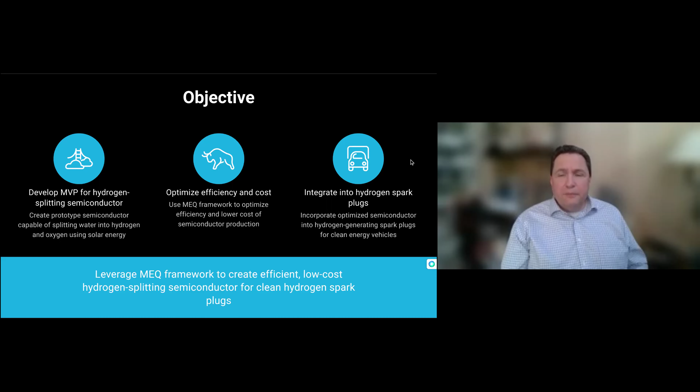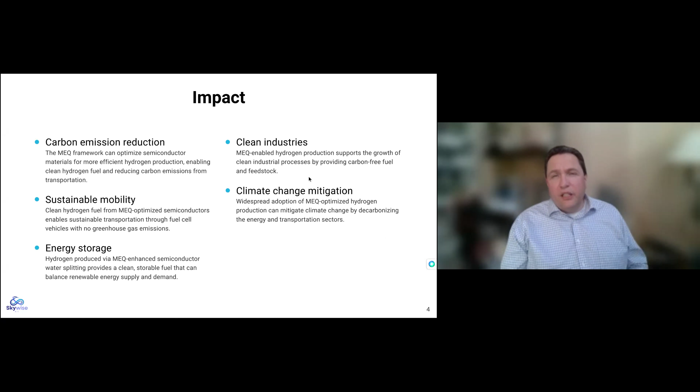So the impact, how we're going to measure that impact - there's a number of different ways that we're taking a look at it. We want to look at the carbon emission reduction, the greenhouse gas reductions. We want to look at different ways that we can use hydrogen splitting semiconductors for different fuel cells, to really boost up other forms of renewable energy as well too.

So the approach is, we want to take a very close look at the material selection and also really scrutinize the theory behind it. And we've been doing that along the way, and it's been turning out pretty well.

And why it's valuable, why do this? It may seem obvious, but I'm going to spell it out here. If we can have an efficient, renewable source of hydrogen energy, it will change the power grid landscape entirely. It will change the way we do remote energy and power, beyond things such as our spark plugs for cars. It will transform feedstock industries - think of ammonia and methane and things that are hydrogenized. All of those things can now be made with clean, renewable hydrogen.

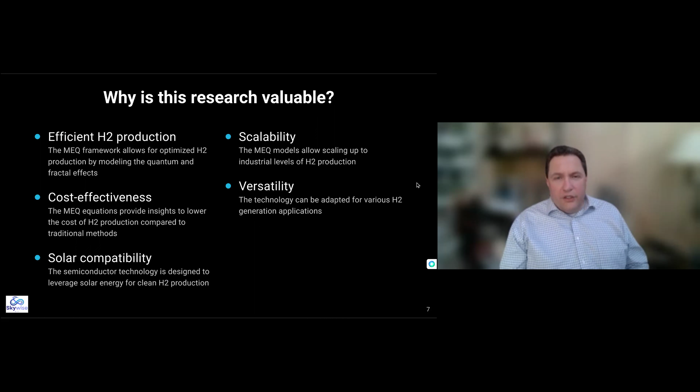So this brings us to, how will this change things? It actually has a transformative effect on the entire global economy. If we're able to accomplish this, and we're well along our way there, it will literally unlock new billion-dollar markets

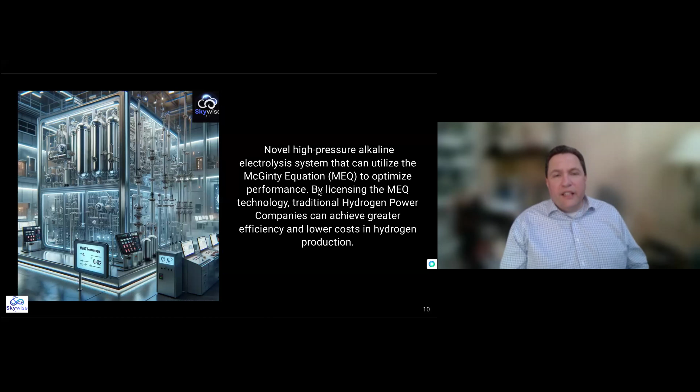So this is an example of what we're doing today. This is a prototype or a vision of what a high pressure alkaline electrolysis system would look like. That technology has been around for quite some time. However, if you're familiar with it, it's energy intensive and very large pieces of equipment. So we looked at that first.

We wanted to find ways that we could reduce the energy use and primarily increase the hydrogen output. If we can get more hydrogen out of it over time, that's going to make an impact on costs. So we want to improve the efficiency and decrease production costs. Really the main focus here is to increase that hydrogen output.

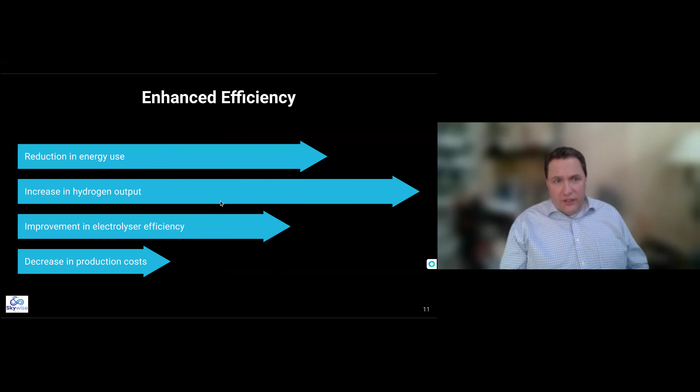In our conversations, where we've taken this to is we're looking at reducing the overall power consumption of electrolysis from about 35 to 38 kilowatts down to 15 to 18, which will make a dramatic increase in the amount of production we can do for the energy that's consumed.

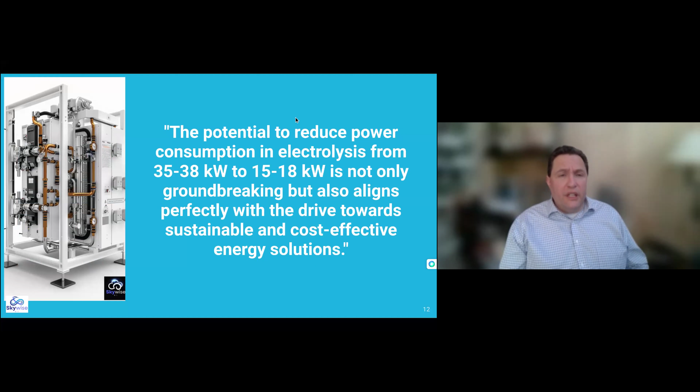So to do this, we're going to use new electrolyte surfaces. This is an example of one. These are complex patterns that are utilizing fractal geometries. We use the MEQ equation or framework to determine what these electrolyte surfaces should look like, so that they're dealing with some of the subtle perturbations of gravity.

This shows the efficiency in some of the simulations and tests we've been looking at using this new material versus the old, and then the durability, of course. We're seeing that to be a little bit higher as well too. But again, these are all in the simulations for the prototypes.

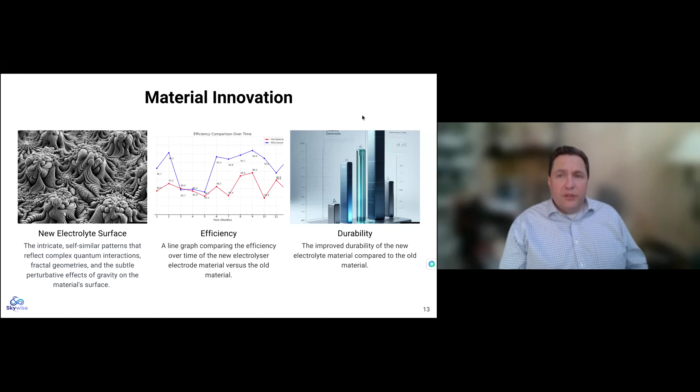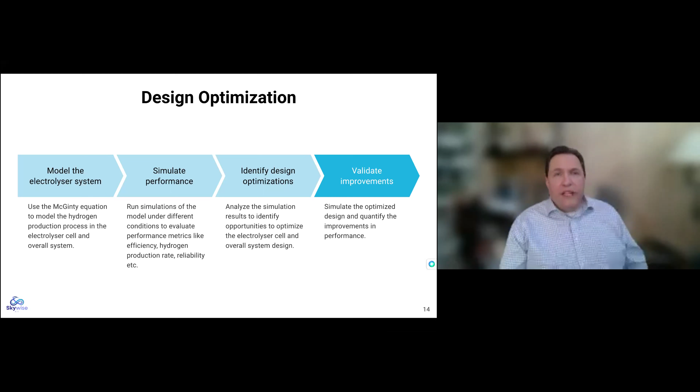The design optimization was kind of what I showed you, some of the smaller systems that are a bit more efficient in general. But we want to model the original, we want to simulate performance, and then we're implementing right now the design improvements, and next stages will be to do the validation.

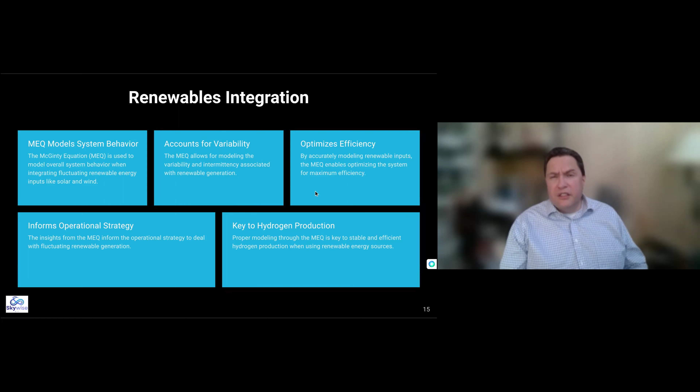One of the really nice things about this is that it does integrate with other renewable energies, like solar power and wind power, in concert or combination. We feel this is going to be key to reducing any problems with the power grids. By utilizing the hydrogen energy, the hydrogen power to power the solar and wind as well, that's another way we can continue the sustainability efforts.

Which brings me to sustainability. This is kind of where we're at right now, at number one, where we're optimizing the hydrogen production efficiency. Because right now, the way we're doing it is using the best science that we have. However, we've got some new science and new tools in the form of advanced artificial intelligence that's really showing us some pretty neat things.

So these are kind of the steps down to where we're going to get to the point where I'm saying using the actual solar and wind power to actually power the hydrogen production as well.

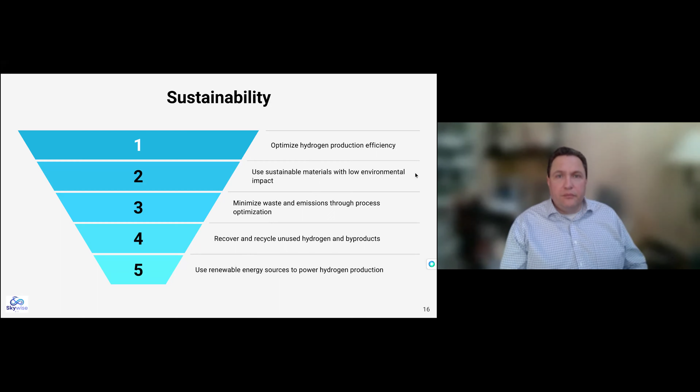So what is hydrogen splitting, and how do we get to that point? Because just generating hydrogen power is much different than hydrogen splitting. So what we're going to do is build semiconductors at the nanoscale that will be able to split the water into hydrogen and oxygen. That has great potential to affect everything from our phones to our wearable devices to all kinds of different nanoscale technology, along with much larger things up to and including ships and boats and all kinds of things. So, we'll talk about that.

So the way hydrogen splitting works is we're basically using electricity to split the water molecule. It will then split into hydrogen and oxygen, and the hydrogen is used for the power, which would then push the pistons or generate the fuel cells, whatever we need to do for the electric ones, and then would exhaust oxygen.

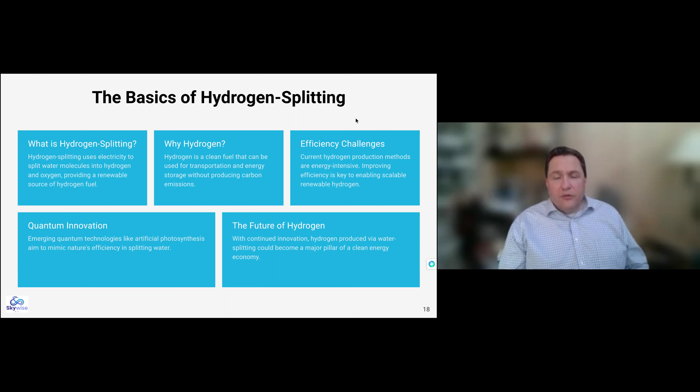The idea would be that for a given car example, it would run on solar power during the day because there would be semiconductors that can take solar power and charge it up. But if there's no sun or no solar power at all, it could run on water. And that would be an amazing mark forward.

How the McGinty equation works is that we have the ability to utilize fractal geometry to determine what they call the perturbations of the gravitational force in the quantum field. That allows us to zero in with a very finely tuned lens, look at quantum tunneling. We have algorithms for band gap engineering, and we also look for passive defects, so that we can mix the best of all these three different ways of going about it.

This is a bit more about what we call quantum enhanced defect engineering, and this is one of the grids that goes along with the algorithms. Basically what it's showing is how the defect density would affect the efficiency of the actual splitting itself.

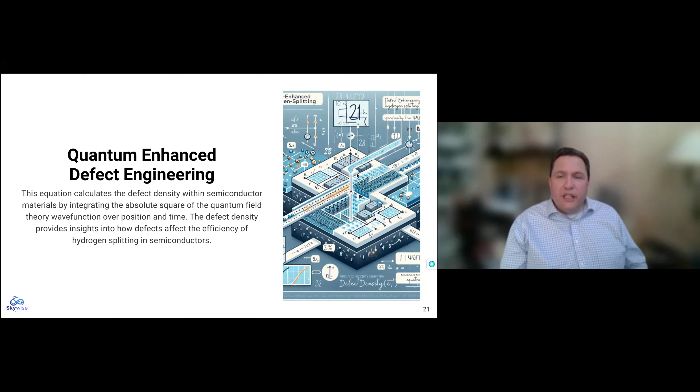We validated the model last year. We're wanting to integrate the model into the reaction pathway simulator. We started working on that, and now we're doing simulations. Hopefully we'll be publishing more work on this towards the middle of the year.

Since we've begun doing these presentations, we've actually published 5 pieces in the International Journal of Theoretical and Computational Physics, all of which have been double-blind reviewed. That's been helpful for getting the information out to academics and to people who can use it.

So some of the takeaways here: by using the McGinty equation framework and utilizing quantum field theory, fractal geometry, and gravitational influences, we can now map some of the different reaction coordinates. By mapping these reaction coordinates and the tunneling pathways, we'll be able to better understand it. That's the first step in actually creating a final working prototype.

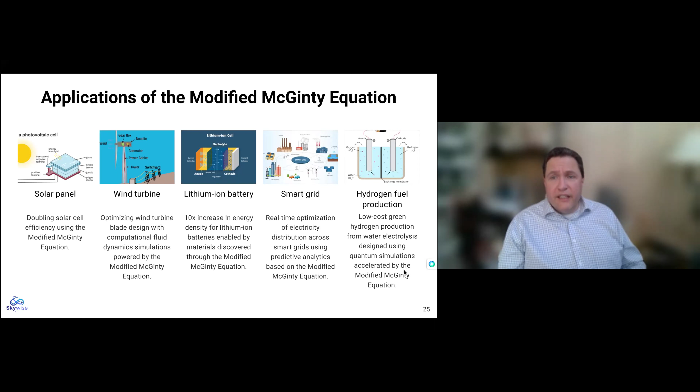I spoke earlier about the smart grid and how we can use stored hydrogen, when there are disasters or other types of situations, to regulate and smooth out any dips and valleys in the power grid. And then hydrogen fuel production, again, is the big one we're talking about today.

So how we're getting to this is in order to make this jump from the hypothetical Stone Age into a real working hydrogen powered economy, per se.

These are the kind of ideas behind it. So the theory behind it is to utilize these principles, the quantum field theory, the fractal geometry, the gravitational effects, and to unify all those theories.

We're making the experimental predictions, and now we're in the validation stage. We're looking for partners, collaborators, institutions, universities, different types of folks working in areas like this, interested in collaborating, because there's so much we're discovering every day it's almost overwhelming. I'm hopeful someone will see this and think, hey, this is neat.

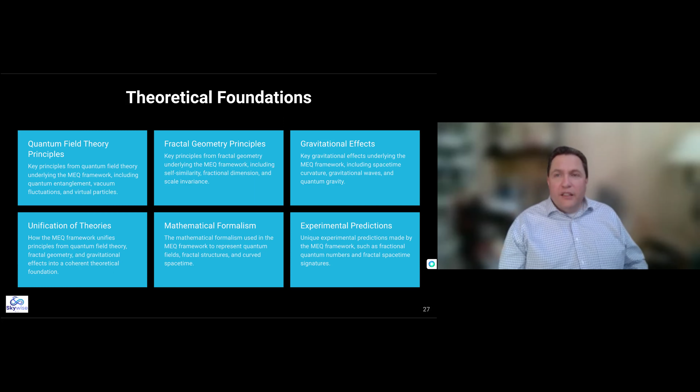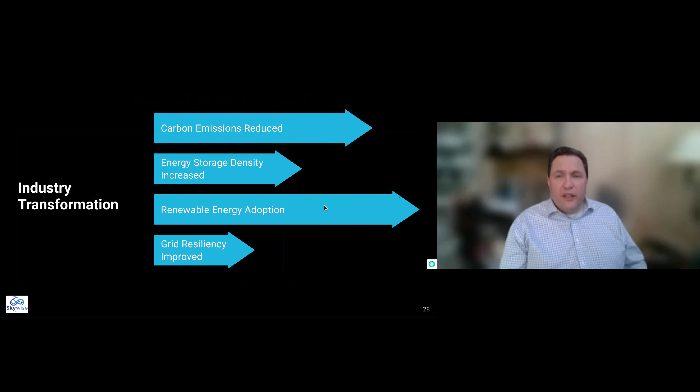So how we're transforming different industries, the big thing here is we want to reduce carbon emissions and increase renewable energy adoption. Those two things are kind of the major purpose of why we're doing what we're doing. This is the plan for the entire project and milestones.

This is really focusing more on the hydrogen splitting semiconductors, not so much the spark plugs. The spark plugs go along with this, but they're actually quite different processes.

We're working on the optimization for the synthesis right now. Expecting by the end of the year to characterize the different optical properties of everything. Into next year, we're going to integrate the materials, and hopefully by 2026 we'll be building the final real prototypes.

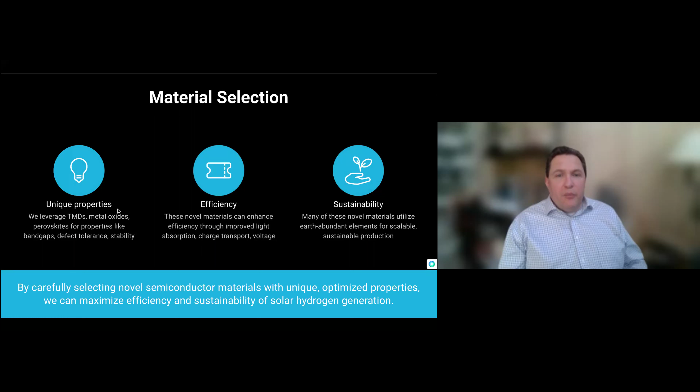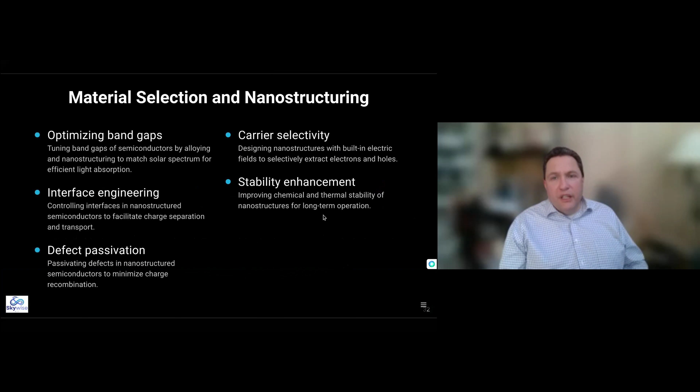The material selection, again, these are some of the properties. We were looking for efficiency and sustainability, which I went into a bit earlier. How we go about selecting it too: the nano structuring part is we go in and optimize the band gaps. We look for defect passivation to understand what defects can stay and what can't. And then ultimately improving both the chemical and thermal stability of that particular substrate.

The expected outcome of this: we're going to improve the efficiency of converting solar energy into hydrogen fuel. We're going to have better stability, the semiconductors will be more durable, and we'll be able to engineer plastics, or really a number of different substrates. That's the thing that's interesting about this particular equation.

By understanding the insights it gives us, it enables us to regulate the uncertainty principle. In doing so, it also gives us the ability to alter and change some properties, like magnetism or other things. We can now engineer at a quantum level new materials, and that, I think, is something on the material science side that's going to be quite groundbreaking. I don't even know where that stops.

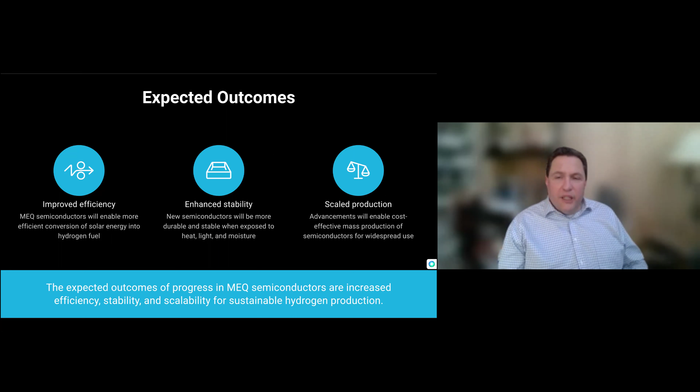We also want to make sure we're scaling this production, meaning we're going to need good materials that are highly available. We're looking potentially at plants in Asia, plants in North America, a plant on each continent basically, so that we can get distribution going in that direction.

So these are some other applications of hydrogen splitting besides cars and spark plugs. Hydrogen fuel production, that's the big one. We can start to do this on an industrial scale. Not to paint a rosy picture, but storage is an issue. There are some issues, but we will get through those. We have some very intelligent people working on this.

Ammonia synthesis is another big one. Think about ammonia and what we'd need to do as far as putting the hydrogen synthesis into it, and even methane and other things. There are so many chemicals that use hydrogen that can now be completely renewable and much more sustainable. Oil refinery is another one, hydrogen is used to process heavy oils. Metal processing, purification of steel and titanium, food processing, glass production.

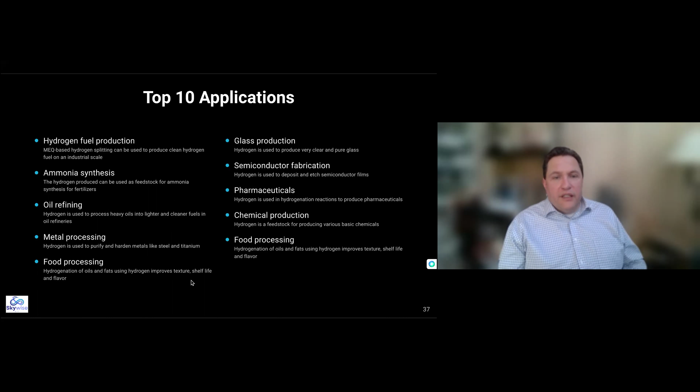This is the one I'm working on right now, the semiconductor fabrication, and renewable energy storage. This is a prototype, or an image of what a hydrogen fuel cell could look like.

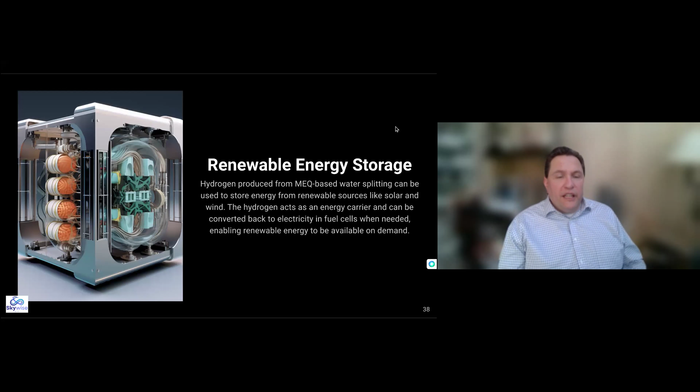Again, we're really trying to push the envelope here and build some things that haven't been done before. Clean transportation, that's something that we're going at.

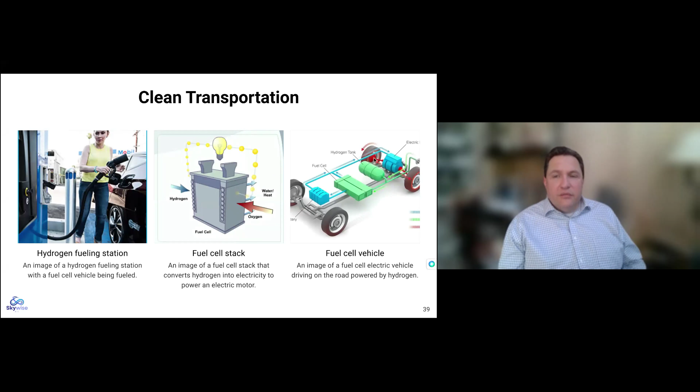This is the idea of the fuel stack. That would have been a cell inside the fuel stack. Here's a hydrogen filling station, where the vehicles would go in. We've kind of done a lot of it.

Decarbonization, cement production, that's another way. Glass production by producing heat, so we can replace natural gas, we can replace fossil fuels. There's a lot of different things that we can do over time.

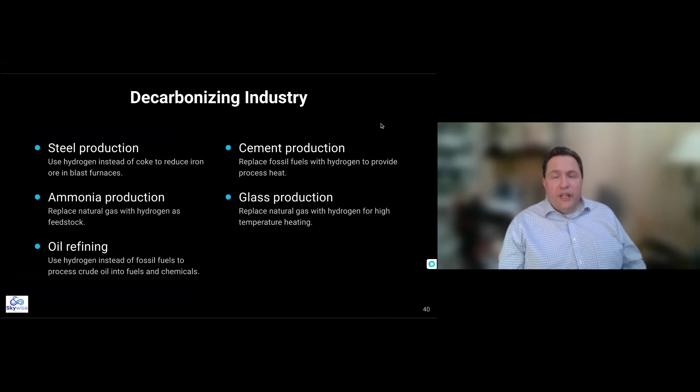This is going to take time, but we have a pathway now to a clean, renewable source of energy that is scalable and efficient. Hydrogen heating and cooling, there's going to be more and more advances. We're going to have room temperature quantum computers. We don't know how yet, but it's going to happen.

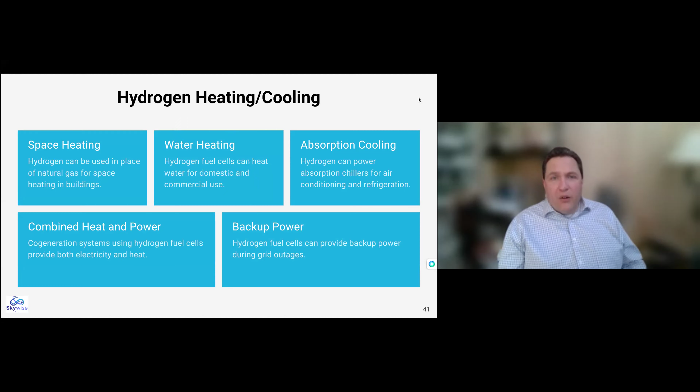We have the technology and the means to do this now. It's just a matter of actually having people do it. Space heating, water heating, backup power, all kinds of ways that the hydrogen can be used.

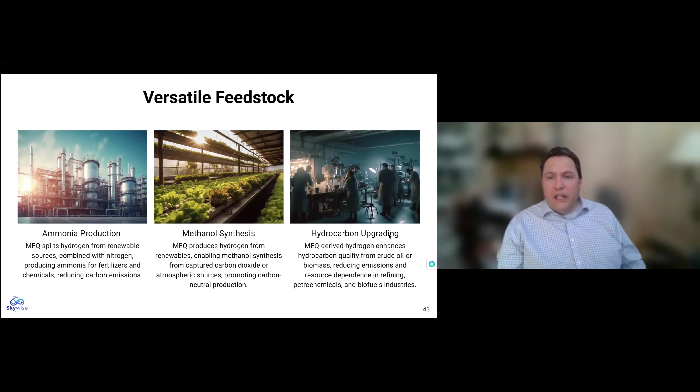We're hoping to increase the percentage of farms using green hydrogen fertilizer in the next 5 to 10 years. It is feed production, methanol synthesis, and then for oil, crude oil, biomass—those areas for hydrogen too, it can be used for refining petrochemicals and biofuels.

Energy storage in remote areas is one thing we want to take a look at. I'm hopeful by the end of 2026 we'll be able to put an electrolyzer system in an Alaskan village.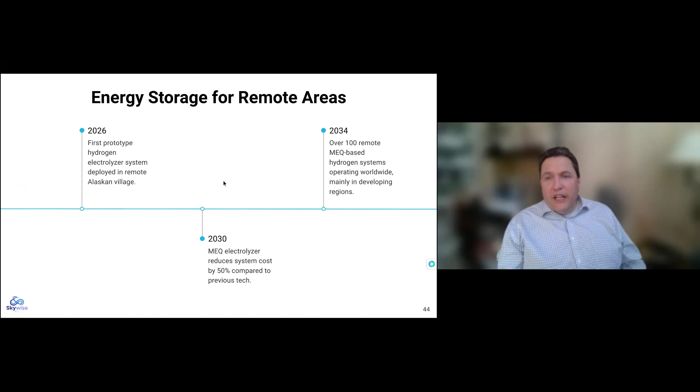Marine transportation, this is another one where we can switch all of our marines and boats over to hydrogen fuel cells. So this is where we're at: we want to install the fuel cells and storage tanks on ships and ferries.

We're going to use the electricity from the fuel cells to power electric motors. The fuel cells then provide power for onboard appliances and navigation systems. The excess electricity, once we get to that point, can actually be used to produce green hydrogen, and then the green hydrogen can be stored. So all of those things will go into play.

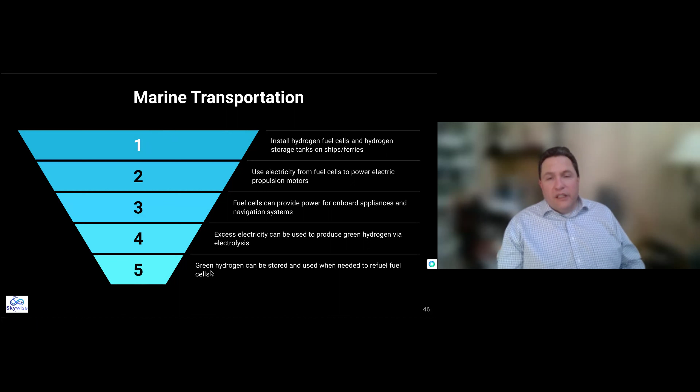There are major maritime companies that can benefit from this. The U.S. Navy, many navies around the world, would all benefit from this as well.

This is what we're wanting to look for too. This is kind of the share of how hydrogen is being used. We've got electrolysis right now: coal, natural gas, and fossil fuels, and we're trying to improve that over time.

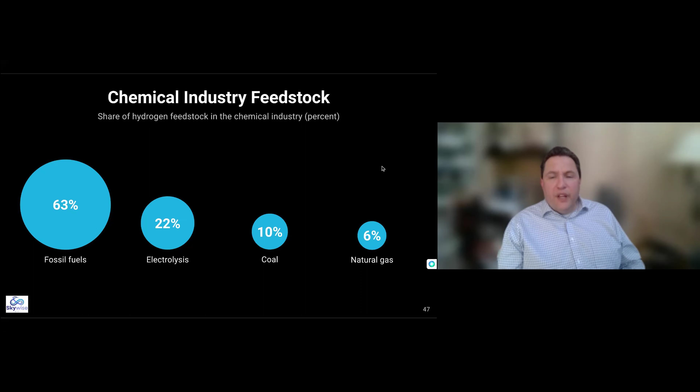So this has been a lot, I believe, that I've put out here, and it's very exciting. I'm hopeful that we're going to be able to continue to do this and bring on even more players with more funding and smarter people.